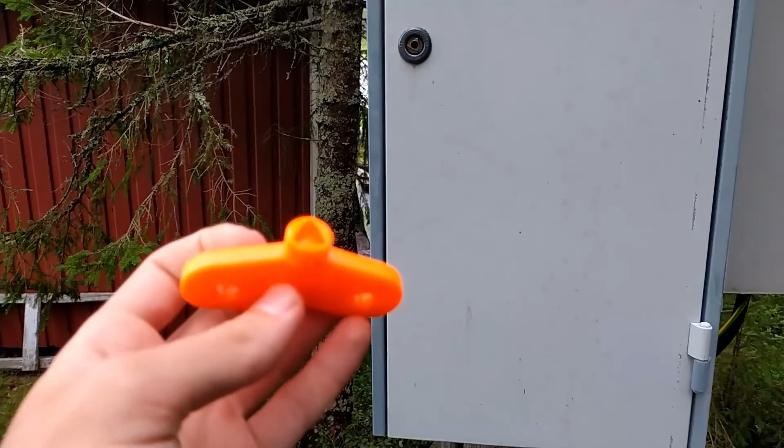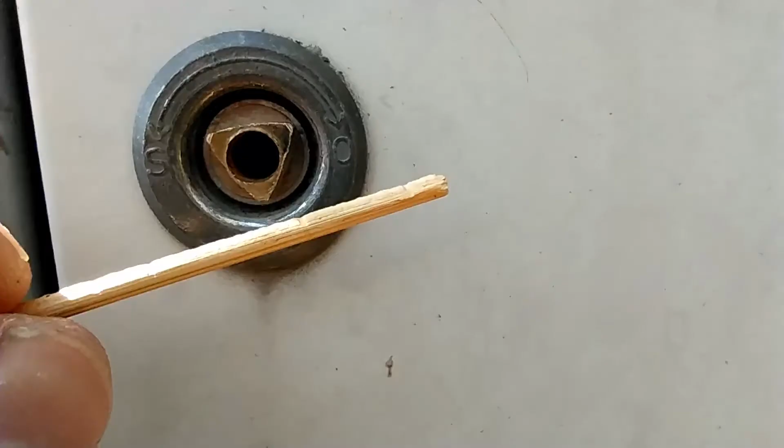In this video I made this key to this box where we turn on our electricity. I don't really know what it's called in English, but it's a kind of breaker box, but only to turn the electricity on. I didn't actually have calipers or anything like that, so I just measured on a small wooden stick.

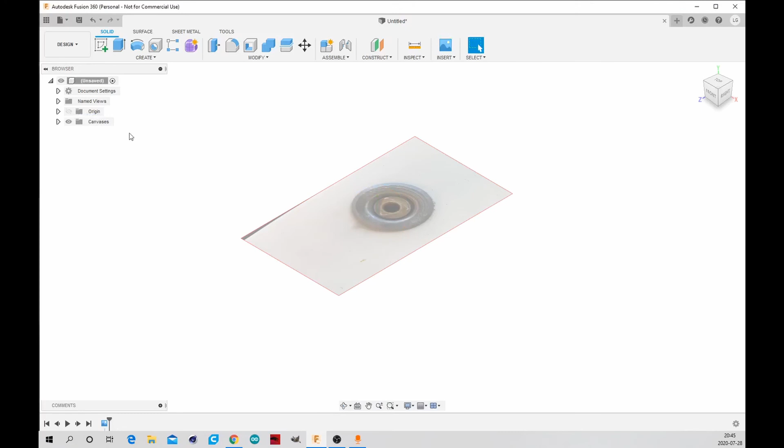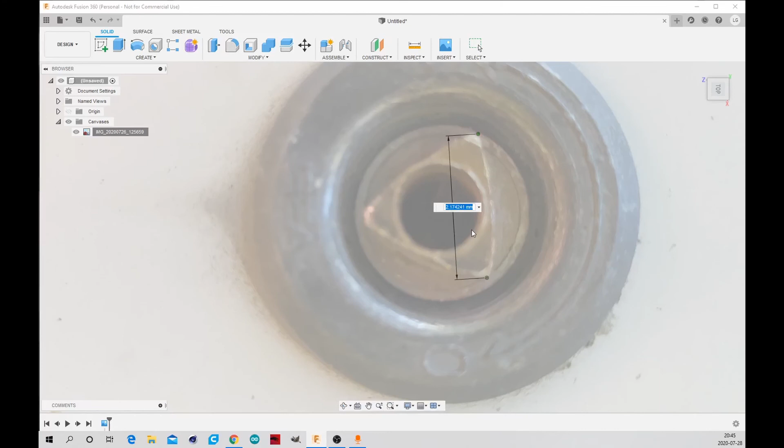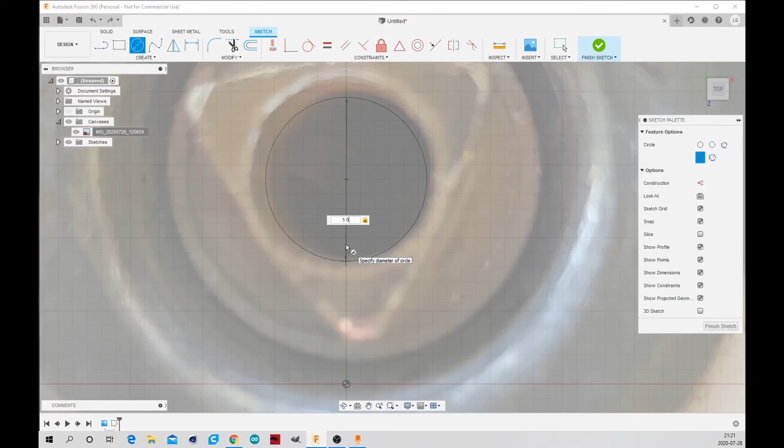Now we have this as a reference to scale the other things. I won't follow that directly, but it's good to have, especially for the bowed parts, to get an idea of how they turn out. This was kind of an experiment, just because I didn't have anything to measure with.

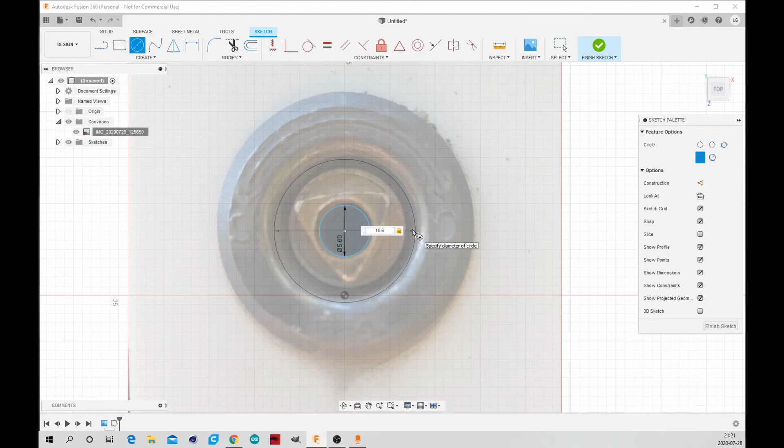I measured with calipers at the end just to show how exact I got, and it was pretty good. It could have been completely wrong, then I would have had to redo it later, but it worked out. There's a hole in the center which was 6 millimeters, so I made it 5.6 to get some tolerance.

But I actually removed that later because it wasn't necessary, and it was just a point where it could break. I also made the outer circle, and now the hardest part, actually making this triangle shape, because it's not even a regular triangle.

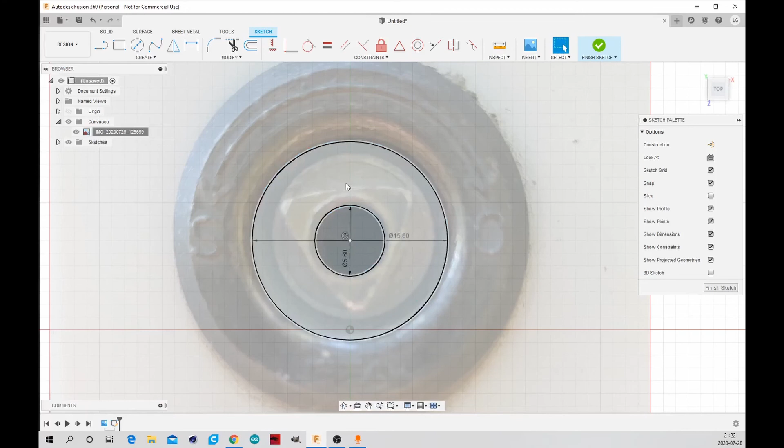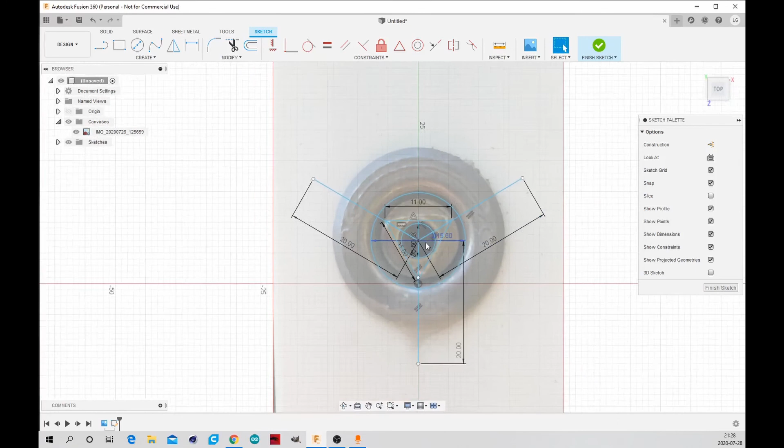To do this I made just one line, and then copied that with the circle pattern to 3 ways to get the 3 different corners. I then took a line and dragged that between them to get the regular triangle.

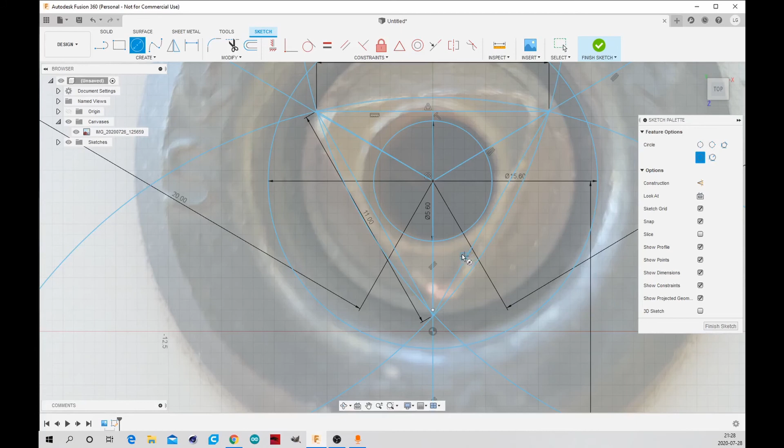Later I used circles that I put 20 millimeters from the inside to get the bowed part. I also made these slightly further out later, I think, to get the part even more bowed, to be sure that it would fit. But that's how I made the basic shape for the actual key that would fit on.

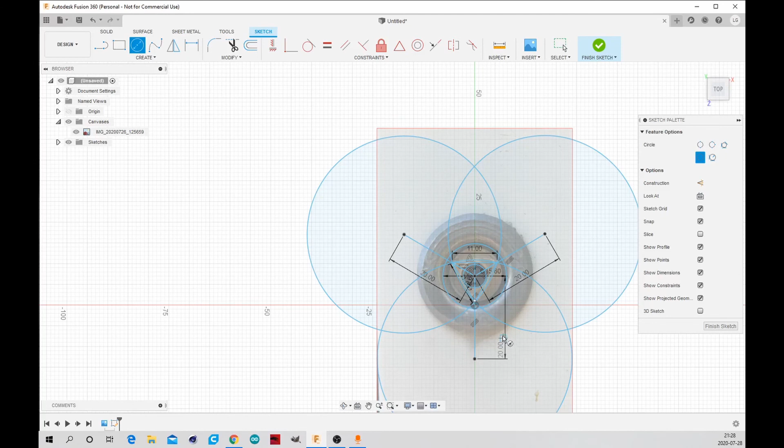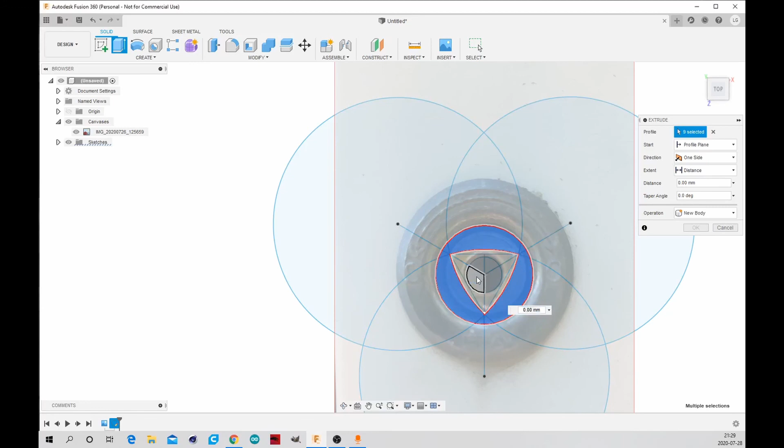Quite simple. Pretty much the only thing was that I didn't have anything that I could measure with, but it turned out well. This is absolutely something you can do without having that good tools. Even just a regular tape measure would have been much easier than this. So 3D printing doesn't actually have to be that complicated.

Here you can see me extruding the part right here. You can see I missed the part for the center, but as I said, I'll be removing that later as well, just because it's easy to break off when there's a lot of small parts.

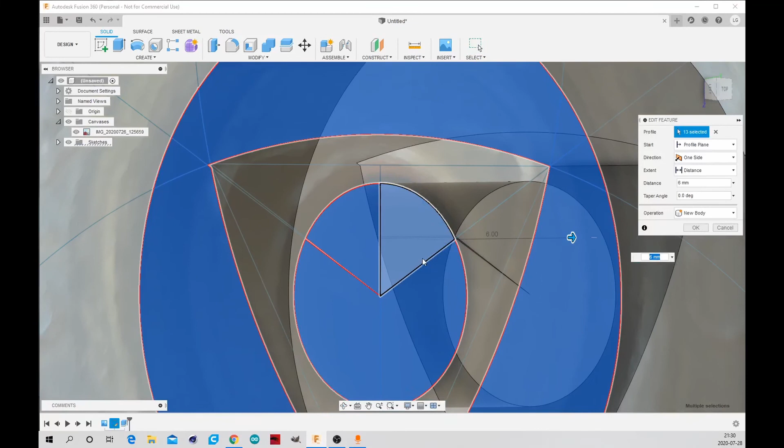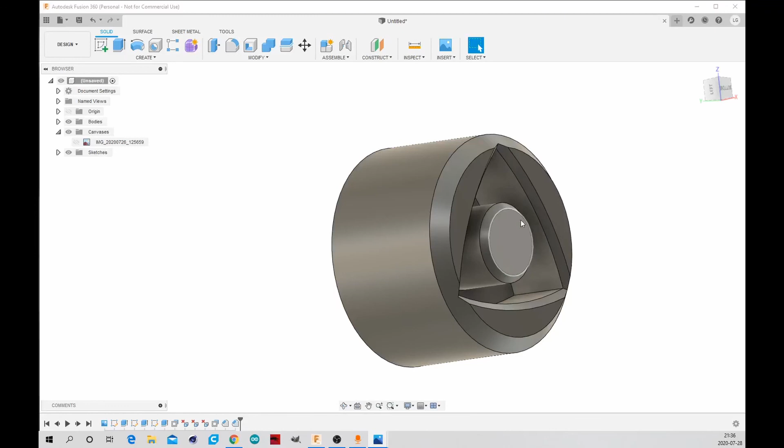So here we have the actual shape that will go around, so you can turn the lock. I've finished it up a bit with some chamfers and things, and now is also the time where I'll be removing this center part, just because I didn't think it was necessary.

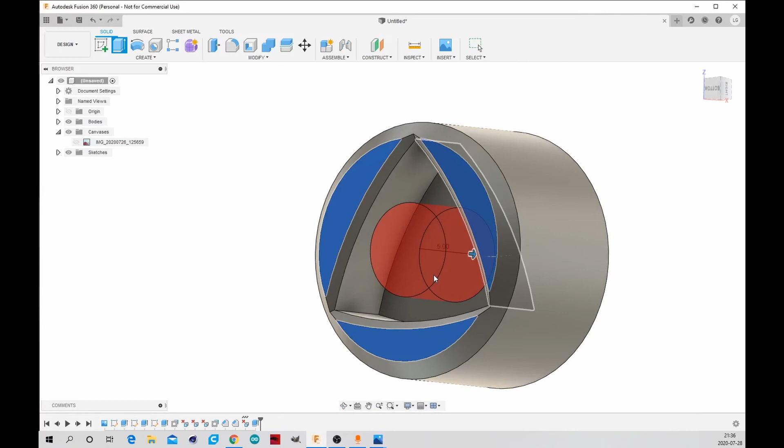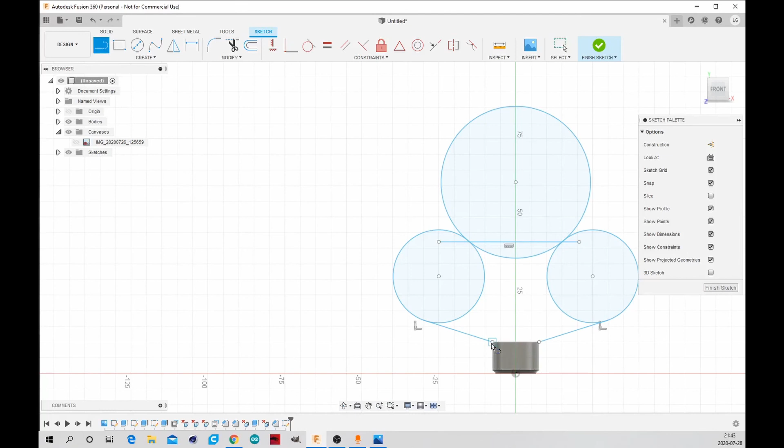I'll just extrude that backwards and remove it completely, and then just have this that goes on. Every time I make something for 3D printing, I try to make it as simple as possible, just because especially FDM 3D printing isn't that precise, and to eliminate failures it's better to make more basic shapes.

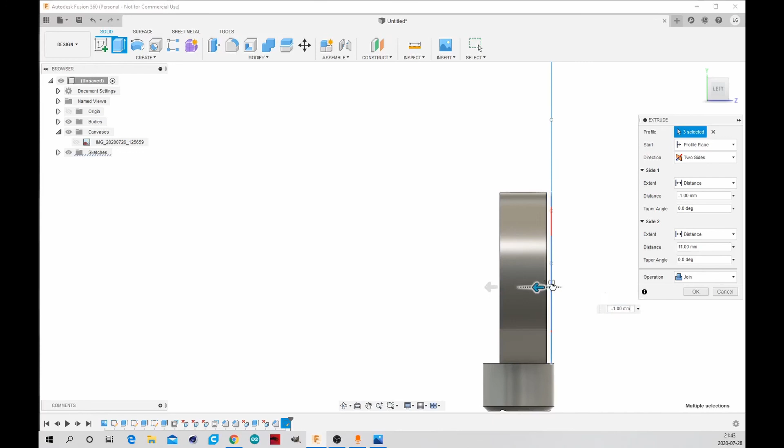After that I just make a really simple handle for it. It was really hard to print, and I really don't like using support, so I actually take and flatten one of the sides.

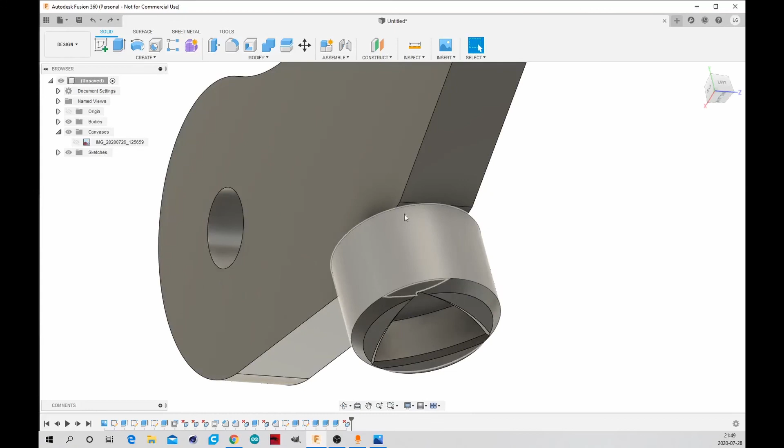But first I just make a small handle just like this, and add some holes as well for putting it on a key ring or anything like that.

Also a small tip: if you have faces that you want to get rid of, you can actually just press them and hit delete, and if they are small it will usually just remove them, so you can get a lot cleaner model with not that many small faces.

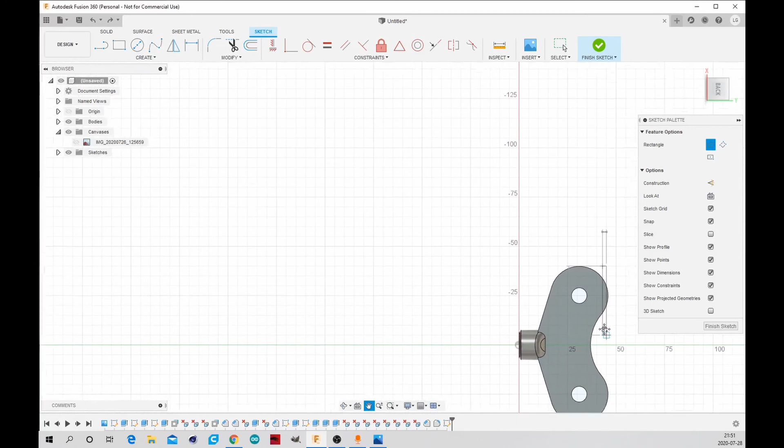So now, as I said, I'll be flattening this bottom side right here, so I can print it with the actual key upwards. That makes it not have any overhangs or anything, and none of the other parts need support either, so I'm really happy that I could make that work.

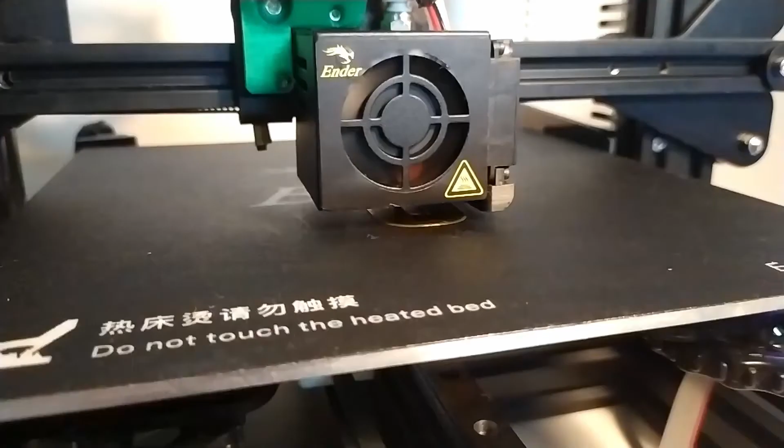Here you can see pretty much the finished model. I think I added some more chamfers as well, but then we go on to printing it out. Just regular PLA, 0.3 layer height on my Ender 3.

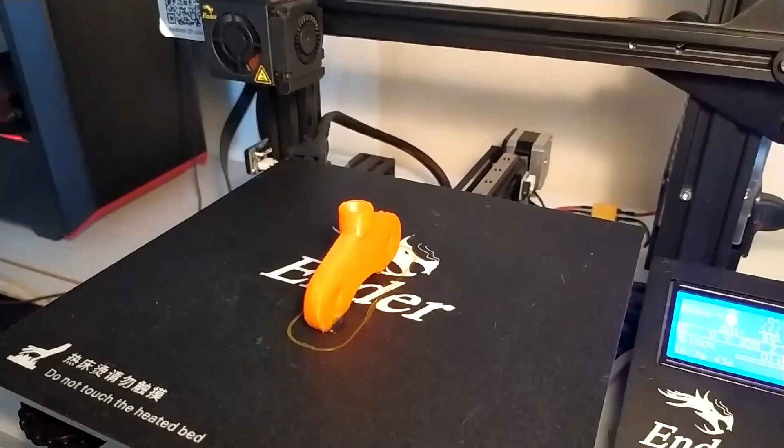It actually turned out well, but because there's so little surface area touching the actual build plate, it nearly came off, so I had to add some hot glue on it, and that wasn't my best idea because it was really hard to get the glue off to get other prints to stick after, but it did make this one work a lot better.

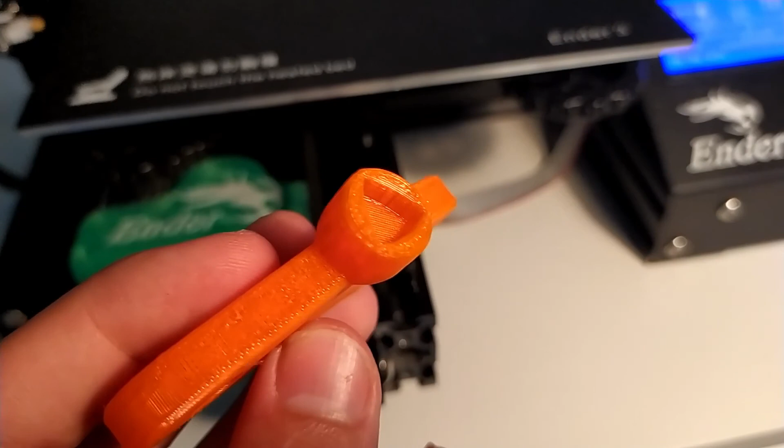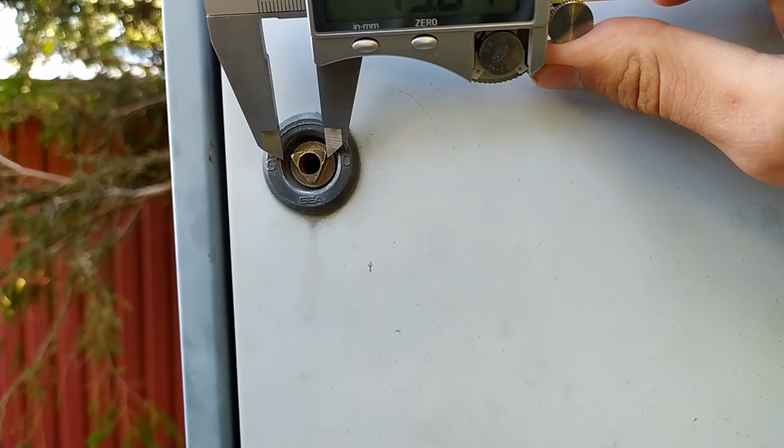You can see it's not that clean because I made it at 0.3 layer height, but I was really lucky with my measurements, and I did make some tolerances as well, but it fits absolutely perfectly on the lock, so I'm really happy with this. This is one of the things that makes 3D printing so useful - you can actually use it for your everyday things.

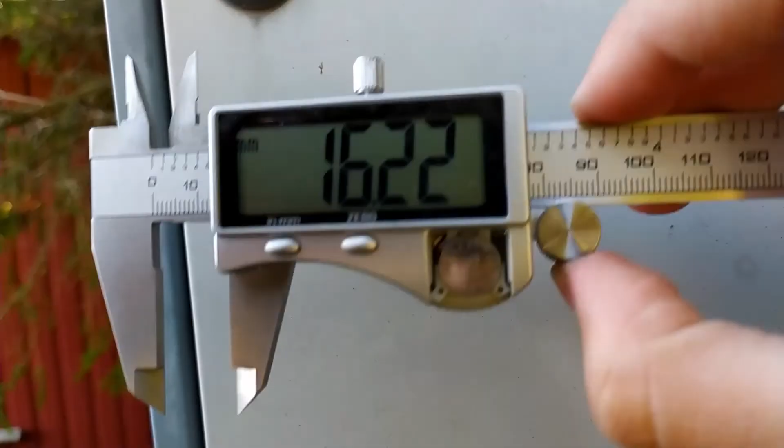Here I just measure a bit after to see. I was pretty much 0.2 millimeters off or something like that, but I did measure with the calipers on the wood stick that I put the measurements on, so it was quite good. But that's it.